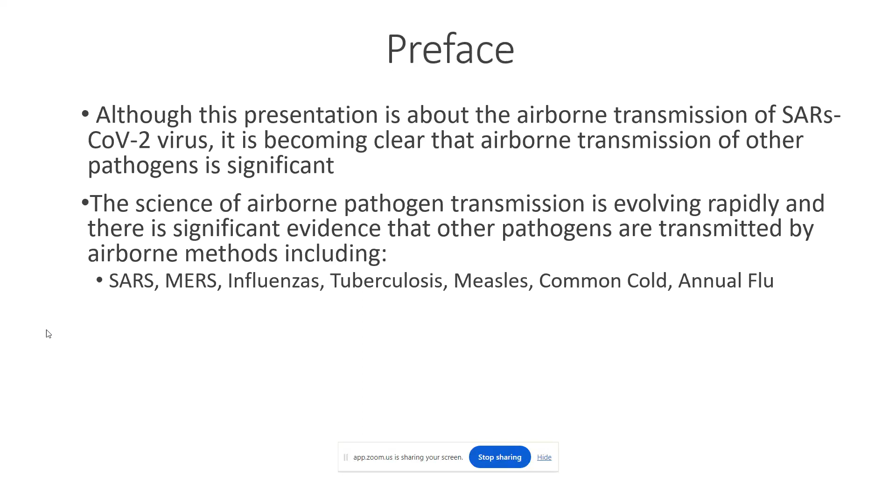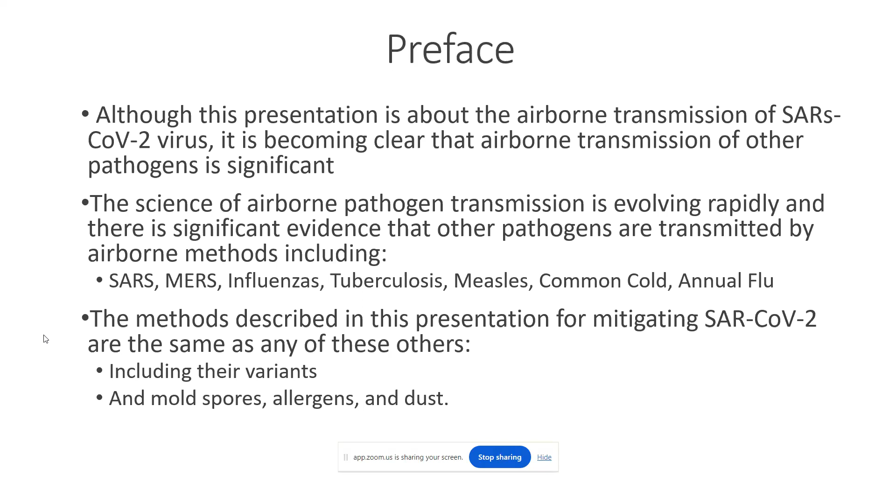So we are indoors. We spend more than 90% of our time indoors now as humans. And so the indoor air environment is going to continue to become more and more important. So we're going to be talking about SARS-CoV-2 here primarily, but all their variants, including mold spores, allergens, and dust.

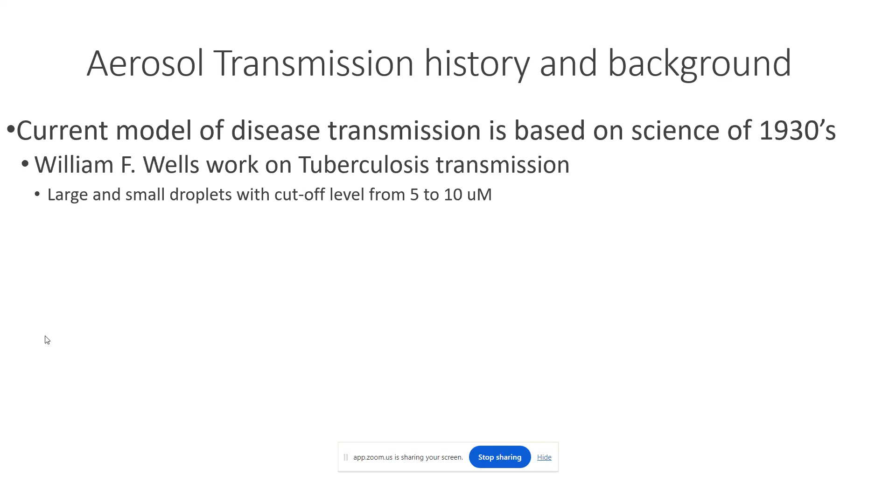So the history dates back to the 1930s on this. A fellow named William Wells worked on tuberculosis transmission, and they thought at first that there was this cutoff level at 5 to 10 microns of size, and that it would fall off quickly after that in terms of size. What we find is that that's not the case, that these coughs and sneezes and talking loudly are really multi-phase events, multi-phase turbulent, which means they have liquid and solid and gas in their output.

It's moist, warm air that comes out of your face and nose and so forth, and that it can extend to distances up to 100 feet per second and 30 feet away from where you are. It is heavily influenced by indoor air temperature, humidity, and airflow. And once evaporated, they can stay in the air for hours.

The half-life of the CoV-2 pathogen is 1.1 hours. It is also true for influenza, it's 1.1 hours. So these things have a lot in common, and they tend to float, particularly the small ones. They float on the air. They float on the thermal currents in a room.

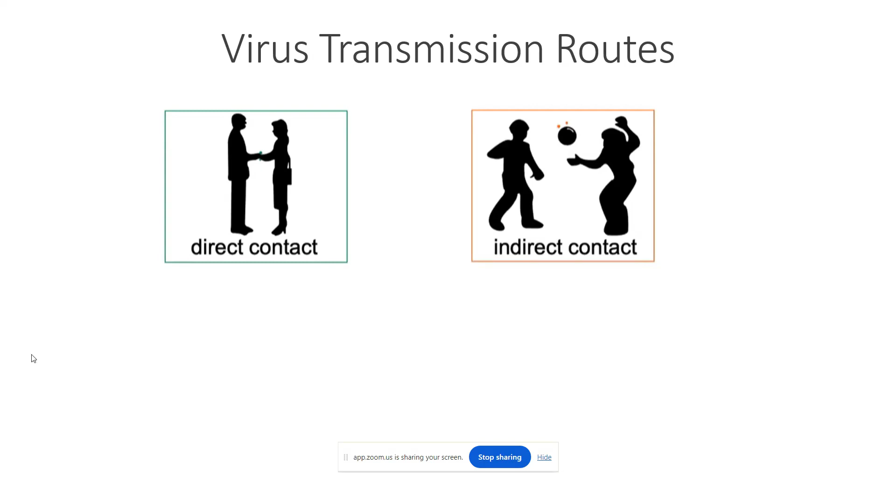Now, there's different transmission routes. There's direct contact. That's shaking hands with someone. There's indirect contact, where you touch a doorknob or a handle that someone else has touched. There's large droplet spray, which some of you unfortunately have felt when someone's too close to you or sneezes or is talking to you loudly in a confined environment, and you can feel it. Not a pleasant thing. And then there's aerosol.

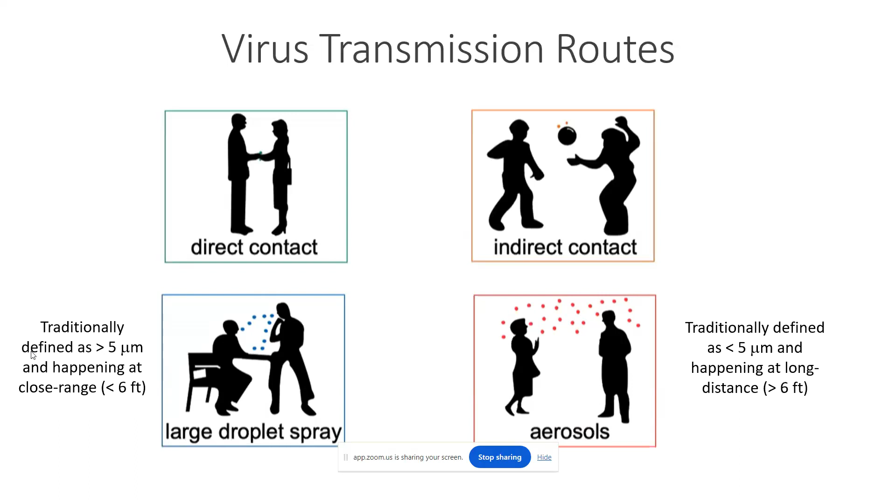Today we're going to be talking about aerosol, and it has traditionally been defined, as I said, by Wells back to the 1930s as having a specific size. But that's not really true. We've learned a lot through both experimentation and analysis of situations, and also computational fluid modeling, which is one of the areas that I specialize in.

We had the bus trip, where on one side of the bus, people got sick. On the other side of the bus, they didn't. We had the restaurant, where 10 out of 68 people became infected in the same area of the restaurant. And then we had the call center. So these are all what we call super spreader events, and they were places that we had the opportunity as scientists to study just exactly what the situation was, some more than others, but clearly these stood out as events.

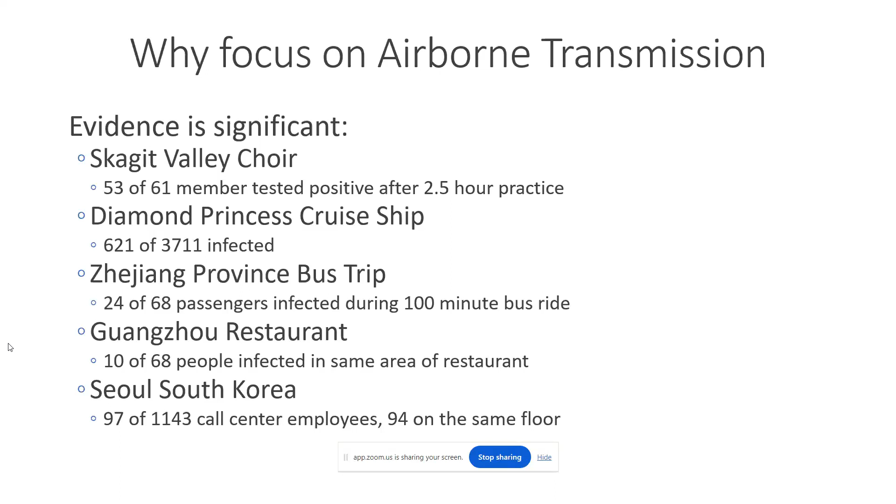By the way, no transmission outdoors. So there is no transmission of these airborne events outside. It's only in the building. And so air quality inside of buildings is becoming more and more important for these reasons.

The transmission mechanics are really that there's this thing called a viral load. And the viral load, let's see if I can, yes, I think I can. So the viral load comes from this spray that comes out. The viral load is defined by the amount of virus per unit volume. Some people tend to spread more heavily than others, because they're at a different point in their incubation life of the pathogen. And so the viral load can be higher because there's more virus per unit volume.

And what happens after someone breathes or sneezes or sings, depending what they're doing, is it becomes very, very light. It dries out, particularly if the humidity is low. And one of the things that characterizes New England winters in particular is low humidity. Low humidity tends to dry out the droplets. And when they dry out, they become light and they float on the air current in the room, primarily driven by either the cooling system or heating system, or just the thermal temperature of the room.

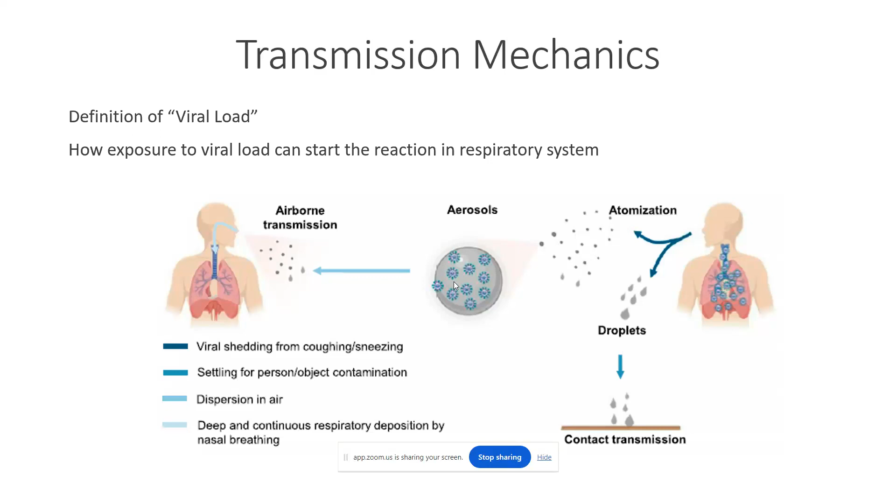By the way, each one of us is about 100 watts of energy that we put out. So you can think of each one of us as a light bulb. And if you've ever gotten close to a light bulb, you know it gets pretty warm. We're 98.6, and we create a thermal plume ourselves that goes up. And in an environment where the ceiling is low, it hits the ceiling and begins to spread and fills the room with a concentration. And then it transmits.

Now, what we also have learned through the science is that the infection period is really a little after 3 days, about 3 days, it starts to peak.

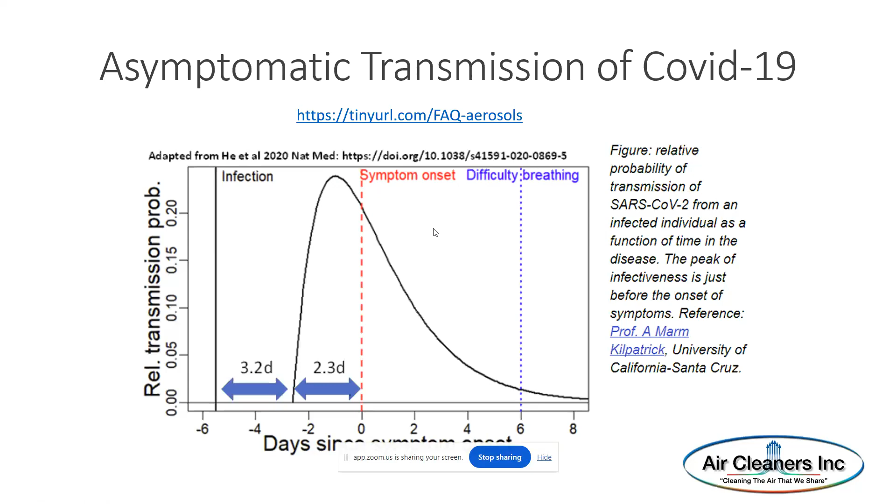Still true today. It's also true about the common cold. By the way, COVID-19 is here kind of a proxy for the common cold or for the viral flu, the annual flu. All these things behave the same way. Size of the droplet is important. As the droplet gets smaller, it gets lighter.

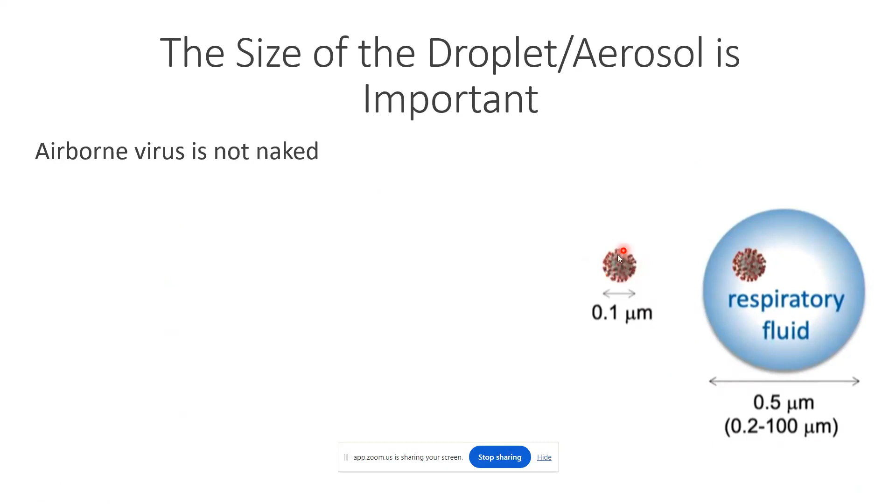Now, we say here that the virus is not naked. It tends to hang around. It attaches itself. So the actual virus itself is about 0.1 microns, but it generally hangs around respiratory fluid. It attaches itself to liquid, and as the liquid evaporates, it becomes lighter. And this does determine how long it stays in the air, how far it can travel, how quick it falls to the surface, where it deposits in the respiratory system is a function of this as well.

Our respiratory systems are best when there's humidity in the air, because the upper respiratory section of our bodies is a major preventative of airborne pathogens, but it needs liquid to behave itself really well. The cilia in our upper respiratory tract is a disease prevention mechanism, and when it dries out, it's less effective. And then the pathogens, the particles, go deep into your lungs and tend to infect you quicker and more seriously.

So masks help and filters help. We'll talk more about masks and filters, but the physics is all the same. You want these things to not be there in the first place, or if they're there, you'd like to keep them as large as possible with water, so it falls to the ground. And you'd like to have water in the air so that our defense mechanisms work better.

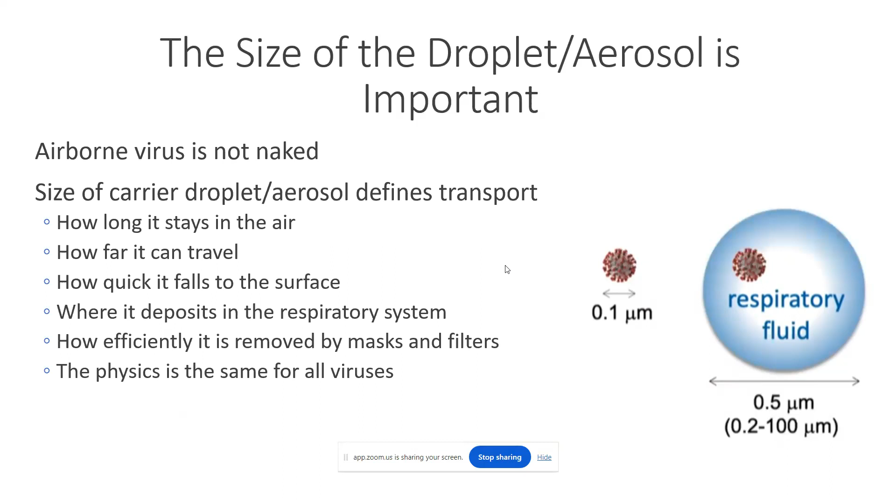This doesn't lend itself well to New England, by the way. New England is characterized by, in the wintertime, cold and dry. The dryness makes our respiratory systems less resilient and more susceptible. And the dryness also tends to make the pathogens last longer in the air. They hang longer. As I mentioned, their half-life is over an hour.

PM2.5 is awfully small, and that's a 2.5 micron particle, and we're finding that we're down in the range of 1 micron when these things dry out. The pathogen itself is 0.1 micron. So these are very, very small. They obviously can't be seen. This is one of the other problems, and they float.

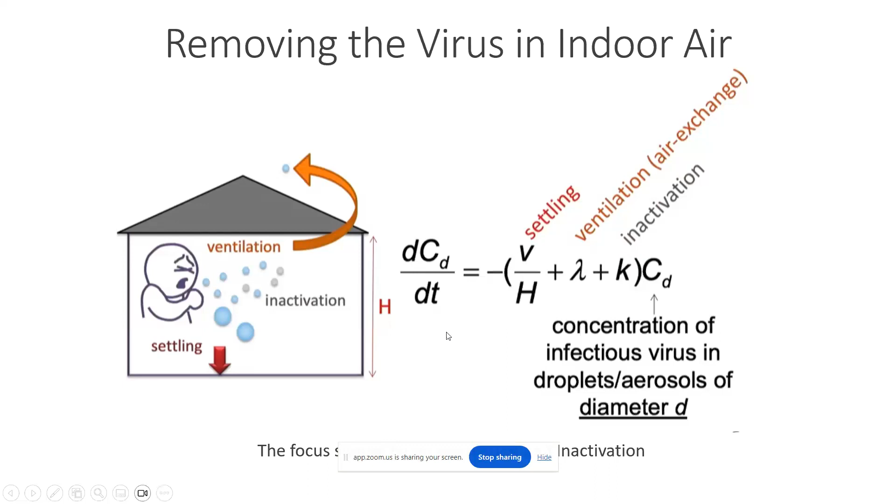So here's a plot of, again, the size. This is half-life. So the half-life of the particles for CoV-2 and CoV-1 both are in that range of 1.1 hours at a relative humidity of 65%. And it survives about 16 hours at 53%. So it hangs around a long time. Again, the half-life is about 1.1 hours.

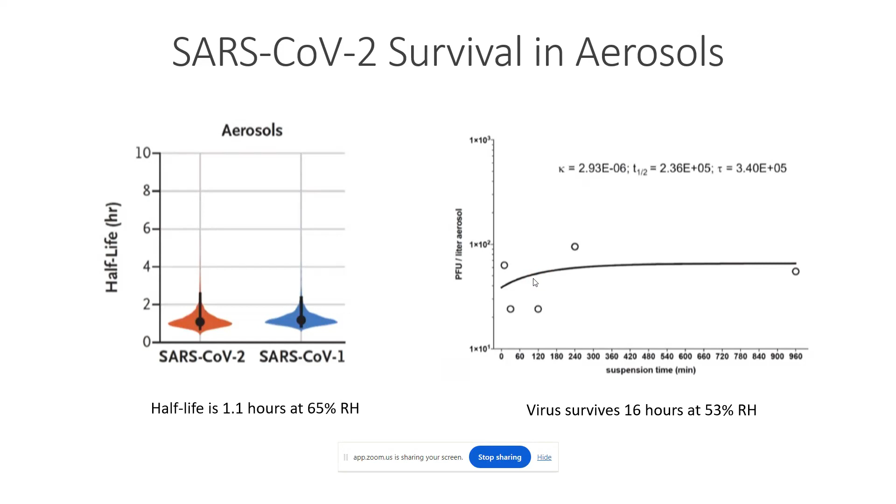So it hangs around. And this is why we have witnessed events where people come into an environment that has no one in it and they get COVID in the environment because someone was there who had it, who put it into the atmosphere of that environment, and then someone else came in and breathed it. So, you know, there's questions about pathogens in general and infection risk in general. COVID has made us more susceptible and more aware of all of this, but these are general issues that exist. We've known it for some time. The indoor environment has not been perfect. In fact, far from it.

Now, ASHRAE, of which I'm a member, ASHRAE stands for the American Society of Heating, Refrigeration, and Air Conditioning Engineers, about 65,000 members worldwide of professionals, including many people in the national laboratories like Pacific Northwest National Laboratory, who does a lot of work in this area, or NREL, the National Renewable Energy Lab out of Colorado, does a lot of work in this area as well. And together, they create these specifications for minimum acceptable criteria for indoor air quality.

And I want to bring this to your attention because all the environments you're living in, you're standing in, you're sitting in right now, should conform to these specifications. And in general, they don't. I can tell you they don't because I study a lot of them. I analyze a lot of them. I go and measure a lot of them, and they're woefully inadequate. And that's just evolution. It's history. We haven't had to pay much attention to this topic over time. And now's the opportunity to do it before we have another one of these outbreaks.

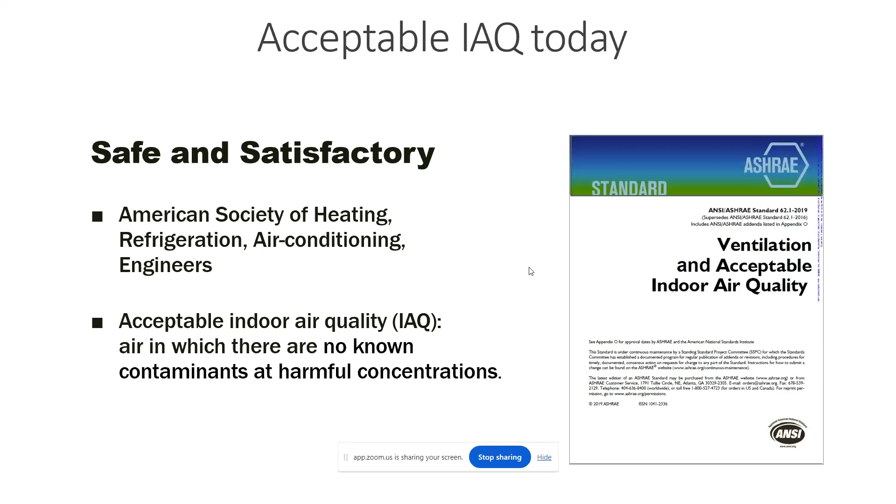But I've been in many environments in both healthcare and in buildings, just office buildings, and of course in our homes, where we're nowhere near the minimum acceptable exchange rate and ventilation for indoor air quality. In terms of impact, it has a huge impact. This just shows you some of the impact in terms of cost. We know it costs a lot to have sick people. These numbers are not going to surprise you, productivity and potential savings. This is 1996 data. We've got 20 to 50% reduction in health-related syndromes if we clean up the indoor air environment, the potential savings.

There's been a book written about this by Joseph Allen and John Macomber out of the Chan School of Public Health in Boston at Harvard. And the book is called Healthy Buildings. And they make the case that if you clean up the indoor air environment and give people a better environment in which to work, that in fact productivity will rise because you'll have less people out sick and they'll feel more healthy. And that will translate into productivity, and it will more than pay for itself.

But if you look at it just from a cost point of view, it does cost money to fix these buildings. If you look at it from an economic finance point of view, it's worth it to do it. But we face resistance because many people don't want to do it. Many building owners view it as the last thing on the list. The health of the building is really far down at the bottom, and we're trying to change that.

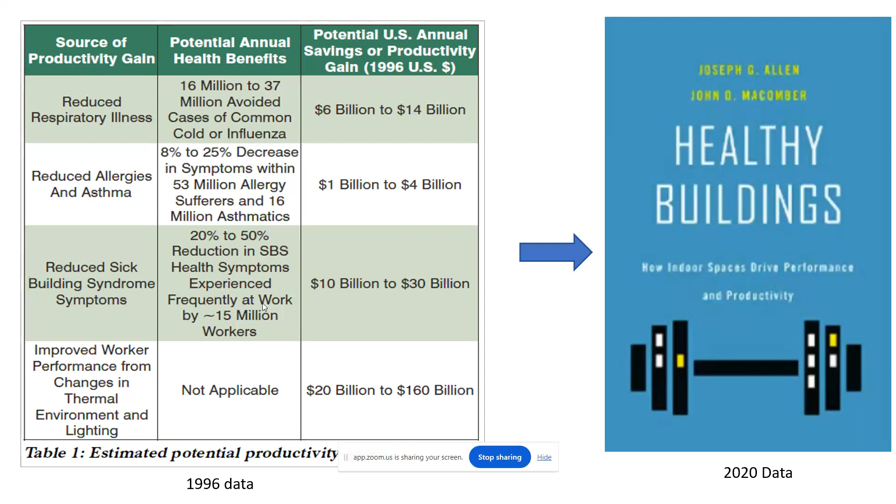I've done studies in California schools. One of the national laboratories, I think it was LBL, did a big study with the schools in California and found cognitive response improved significantly when the kids got fresh air. And they do it by measuring carbon dioxide, which is a proxy for oxygen. The more carbon dioxide there is, the less oxygen there is in a given environment. So they measure it using carbon dioxide sensors, but what they're really trying to measure indirectly is the amount of oxygen in the environment.

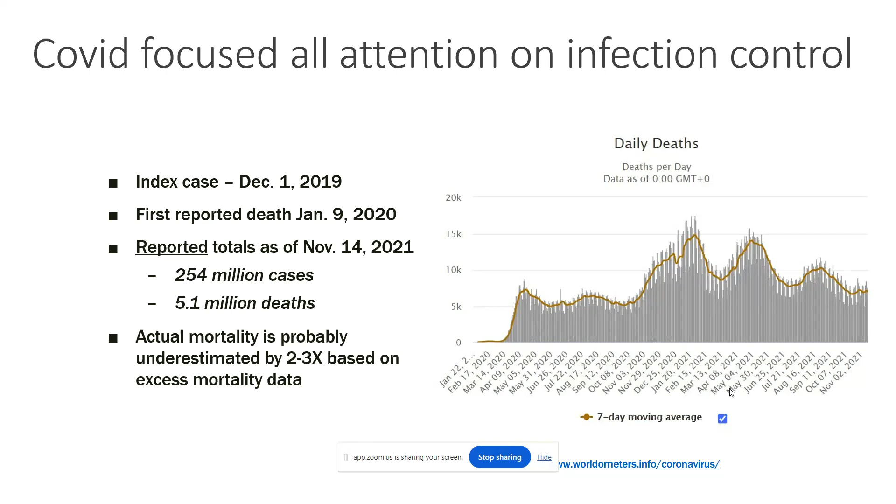So we know this is the case, and we tend to focus our attention on infection control. And this is COVID numbers. But what we've learned is that airborne transmission is the dominant transmission, and that these long-held beliefs about infectious disease transmission are really wrong. Questionable at best is being somewhat gracious, because they're not really questionable. They're wrong. And that everything occurs indoors. There have been no confirmed cases of COVID transmission outdoors during the entire pandemic.

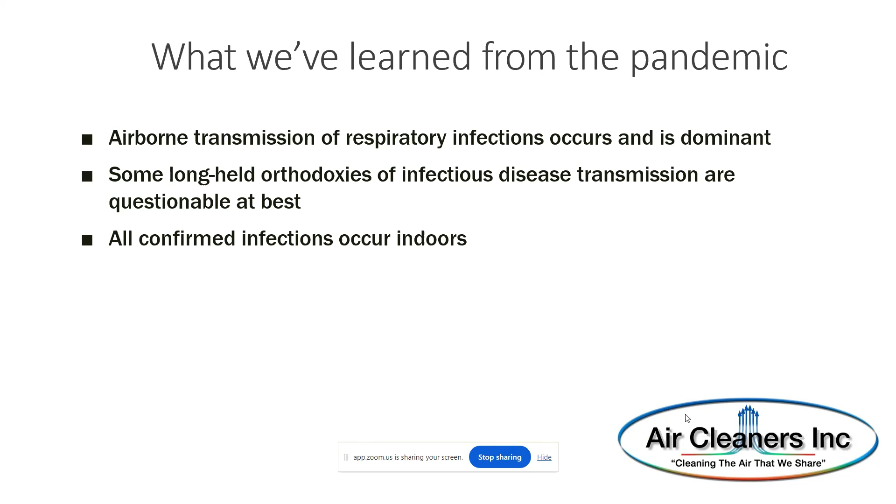And our heating and cooling systems in our indoor environments play a really important role in risk mitigation for indoor environments. But existing buildings as they are, because they're old and they weren't designed necessarily with this in mind, don't offer us much protection against airborne transmission. I'm afraid to tell you that is the case.

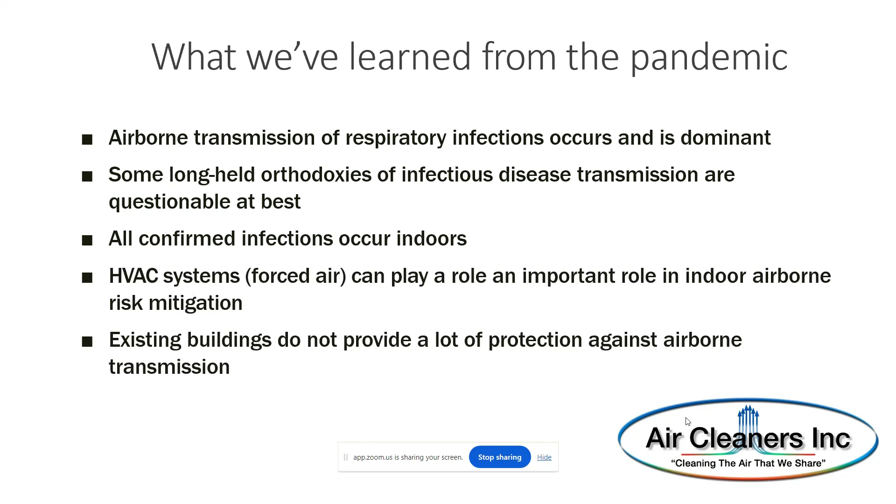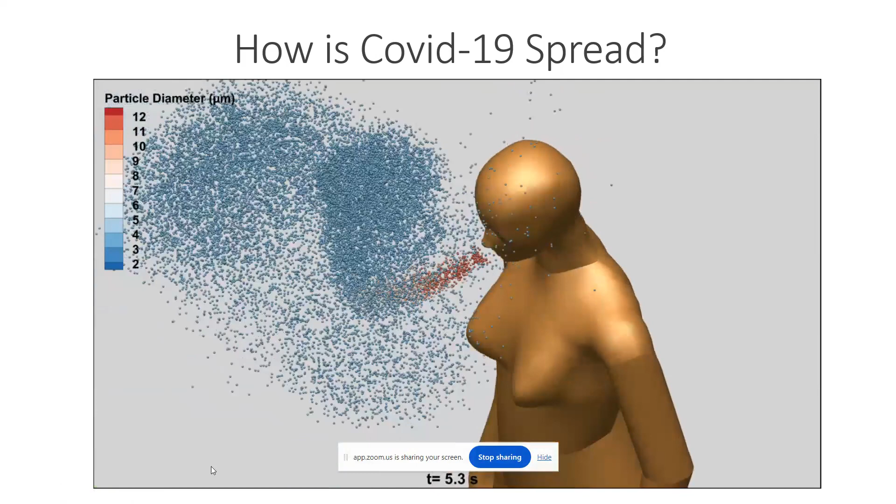This is an animation sequence. If it works, yeah, it looks like it's going to. I hope this comes through for you. A computational fluid mechanics example of someone sneezing or coughing in this case, and you're watching the plumes come out of their mouth, and those are particles that represent droplets, and you can see when you're in close proximity that it just infects the other person quite dramatically. So hopefully these are not virus particles or pathogens, but if they are, you can see very quickly why someone gets infected.

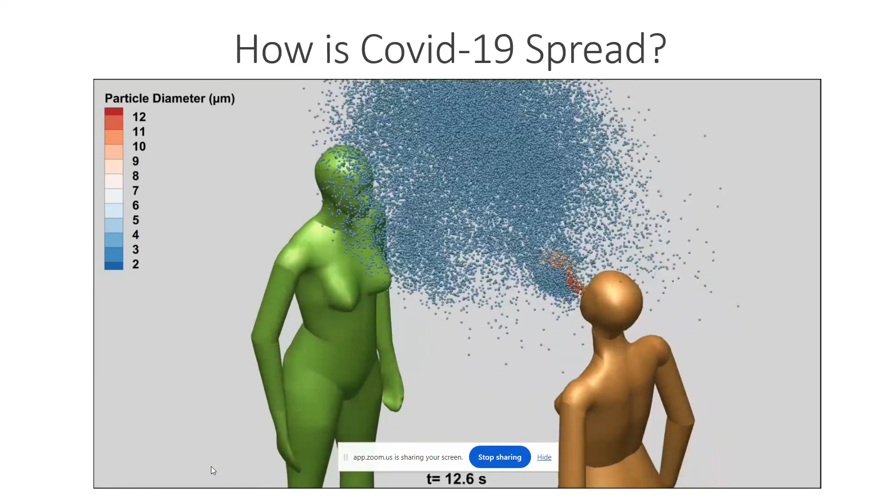So now let me just switch a little bit, and some of this material may get a little thick for you, I don't know, but I'm going to go through it, and if you want me to do it again, or break any of these down into smaller sections and do them individually, I'm more than happy to do it. My job is education. I try to teach this stuff, so I'd be willing to do it more in the future if you ever wanted me to.

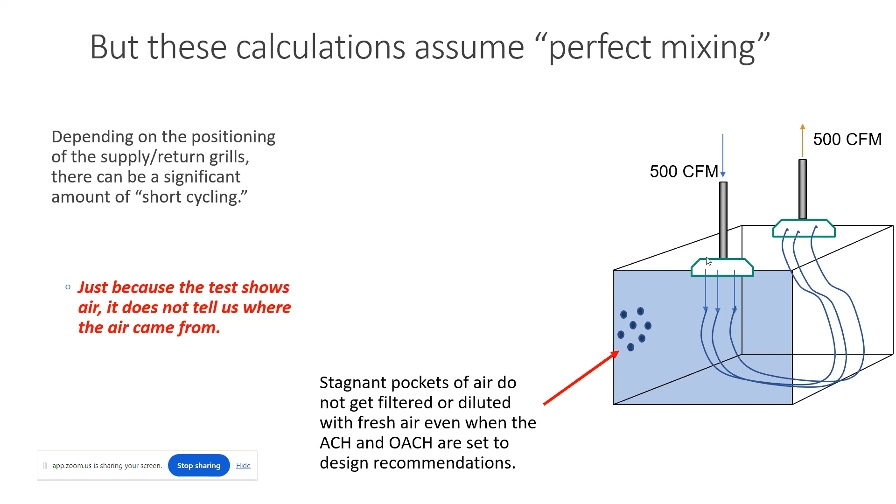We have a measure for that. It's called MERV, minimum efficiency reporting value, MERV. And it should be about 13. The MERV 13 is the level that we're looking for. But the location of diffusers makes a big difference too.

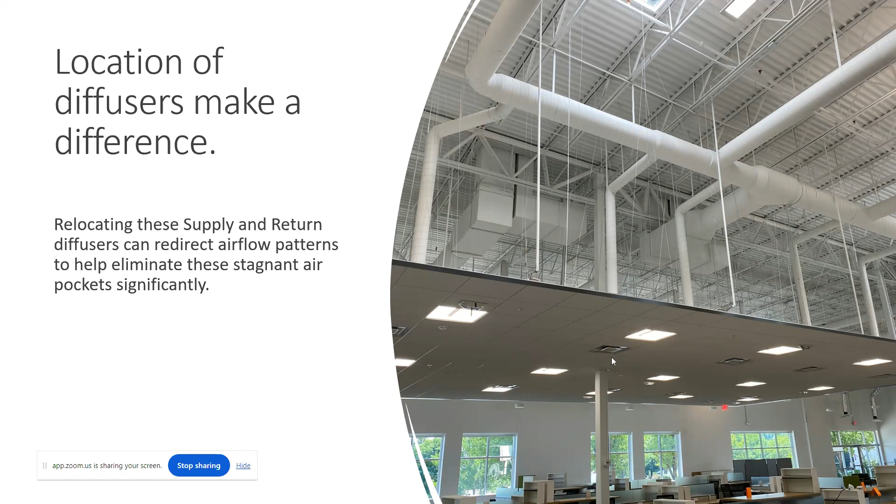This is an example of an office environment. You've got supply going in out here and return going on up there. So, this one's far from perfect. The positioning of the supplies and returns is really important and wasn't thought about in the design of your buildings, because your buildings that you're in right now were built before anybody really thought much about this. Most of the time, the location of the diffusers, the air supply diffusers and the return grills, is laid out for cost reasons, not for pathogen mitigation reasons.

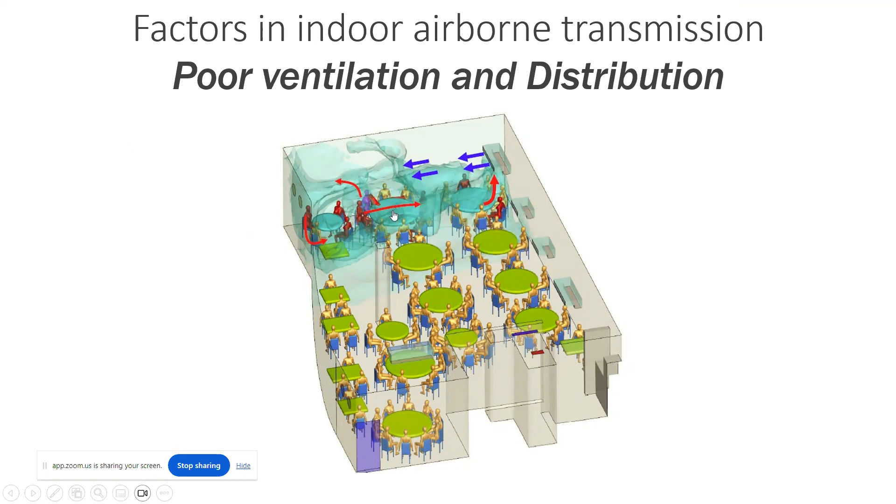And we've seen very effectively that in certain cases, and I think this might be an animation sequence, this is one of the cases, yes, I'm going to get to play this. I hope you can see this. This is a restaurant in China that we studied very carefully. I didn't do it. This was done by some scientists out of China who did this work. And you can see that there's these devices up here that are supplying air, and then there's returns underneath. So this is a recirculation device.

And you can see these people over here in red. They all got infected. This was a restaurant. This was a very famous case of a super spreader event where only people on one side of the restaurant got infected. And they built this animation. This is called computational fluid dynamics, where you can actually model this on a computer mathematically. And I'm just going to run it a little bit, and you can see there's the super spreader right there. You can see the super spreader person is emitting the viral load into the environment.

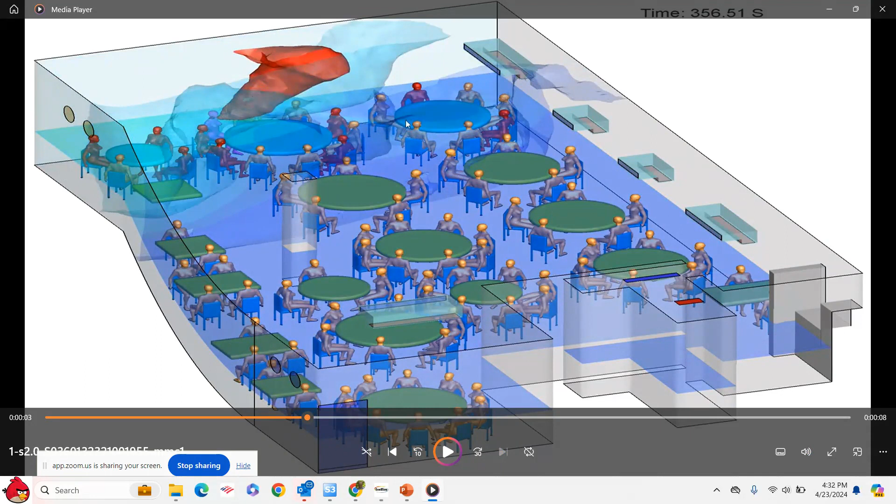And what happens is it gets sucked into this circulating effect here between that heat exchanger, and it gets pulled in, and you see the whole place, only on that side, starting to turn red because the air current is picking it up. And you can see the red zone right here. And all the people that you see in red there got sick. And in some cases, they were just facing the wrong direction. They were facing into the flow. In this case, they were near it. So even where you are in a room can make a big difference about being infected.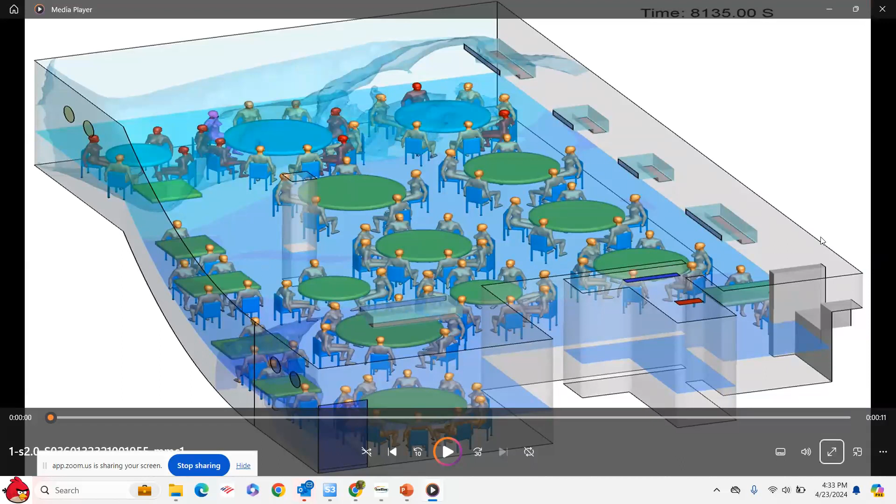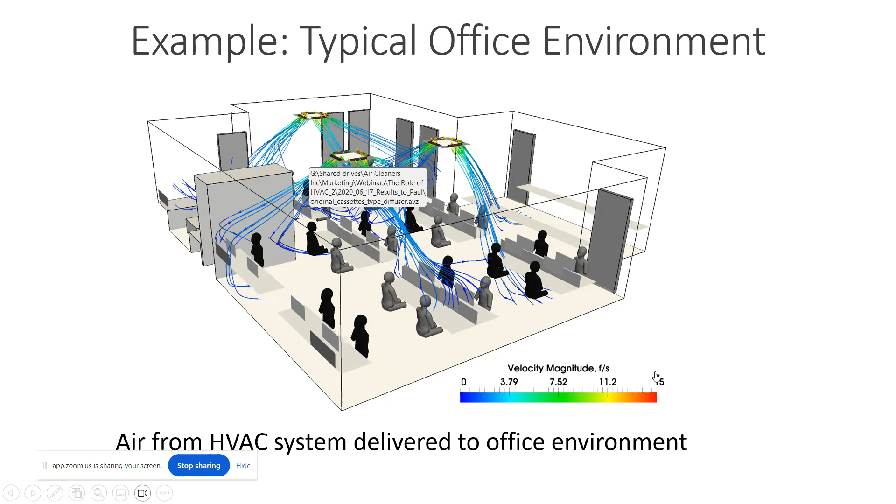So let me get back out of here. So depending where you are, it can make a big difference. This is another sequence here. This is inside an existing room. This is another animated sequence that doesn't look like it's going to work. Nope. But again, you can see a similar effect just from the image. The air is coming in, people are sitting here, and because of the location of those devices, it can be a situation where you can become very infected.

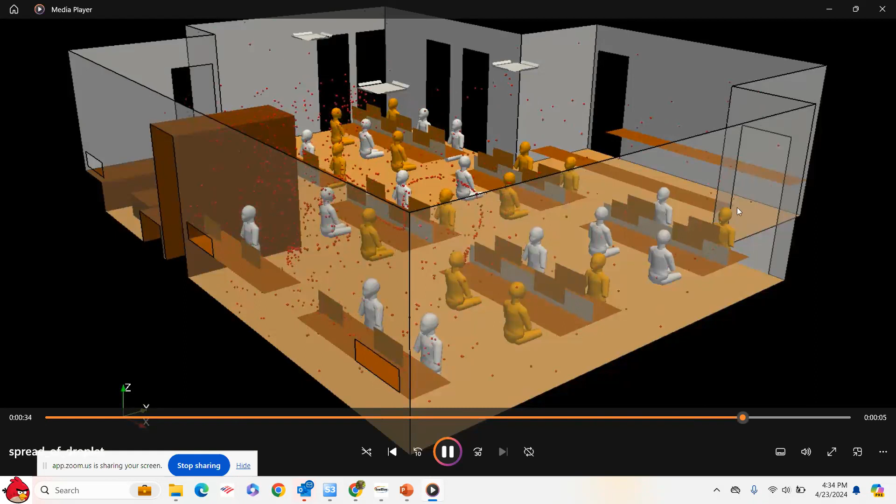So here's another one. This is another animation. You can see the infected person. And what's happening is the air current over in this region, because there's an air supply right here, is causing high concentration in this area. So the particles are coming out of the person, going over to this section and accumulating right in this region of the room, causing the concentration to be high over here. Therefore, people over in this section of the room are going to become infected when people over here may not be. So it's not even uniform within a single room. There tend to be zones of safety, if you will, or zones where you don't get infected and others where you get very infected.

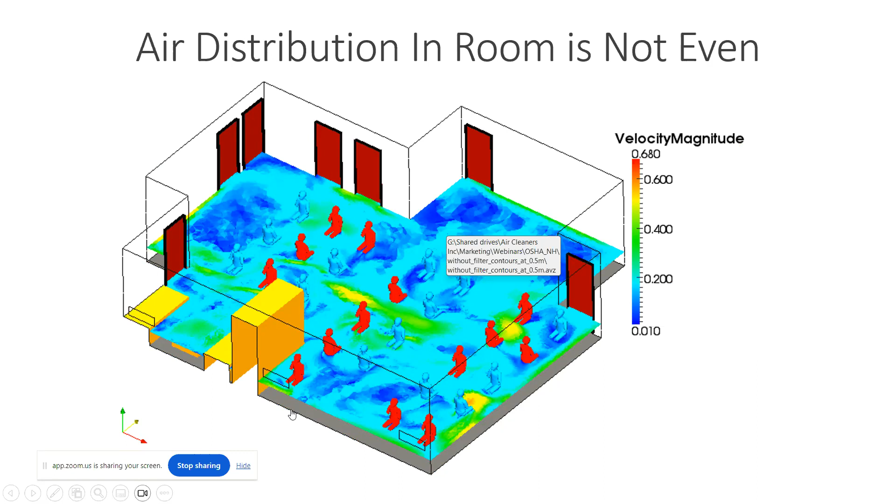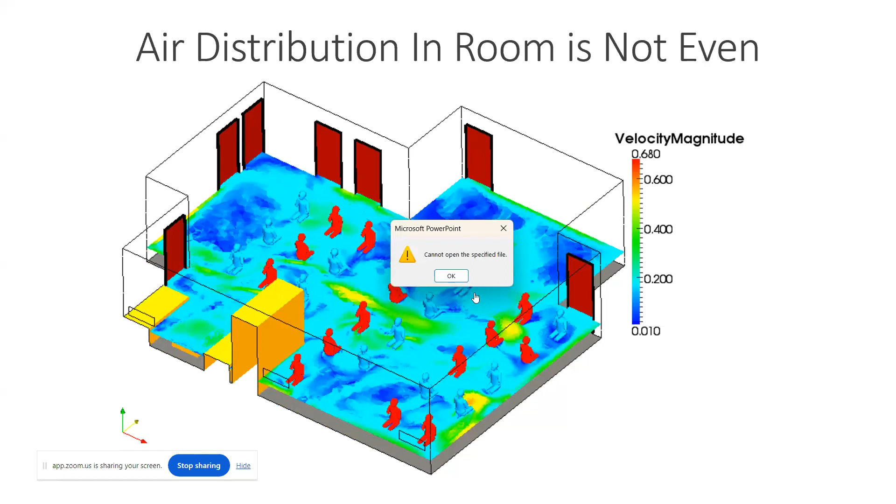Okay. So just a couple of animations. This one shows you here what we're looking at is velocity. You see the velocity is not uniform. What happens is it changes as a function of location. Here I've taken a slice down low. This is the same office environment. You can see some dead zones. The dead zone is velocity of 0. And what happens in a dead zone is, and you can see the one over here I was animating before, it typically will accumulate more readily over there. You can see I've moved up one level now. This dead zone is now quite prominent over in this corner, and so on.

So what do you do? Well, cleaning and ventilation are really additive. If you can't ventilate properly, it's important to clean with filtration. There's a couple ways to do that.

Most effective is HEPA filtration. That's the one that you'd really like to have. You can also do it with something called UVGI, ultraviolet germicidal irradiation. HEPA is high efficiency particulate arrestor filter. So HEPA is as good as you can get. HEPA is what's used in an operating room. In an OR, we use HEPAs overhead, and UV is the light.

So you can see here that relative risk is number one when there's no ventilation. So you walk into an environment where there's no air at all, and you're going to have a relative risk of 1. And then what happens if you ventilate, you can drop it by almost 40% just by getting ventilation there. Open the doors, open the windows, turn on fans, get some fresh air in.

You can do a similar thing with filtration as well. It's not quite as much with just filtration, but it works pretty effectively to have filtration in the room. Again, this is a function of how much filtration, how fast you're moving it, how well it's mixing. You can do both, and when you do them both, it's very effective.

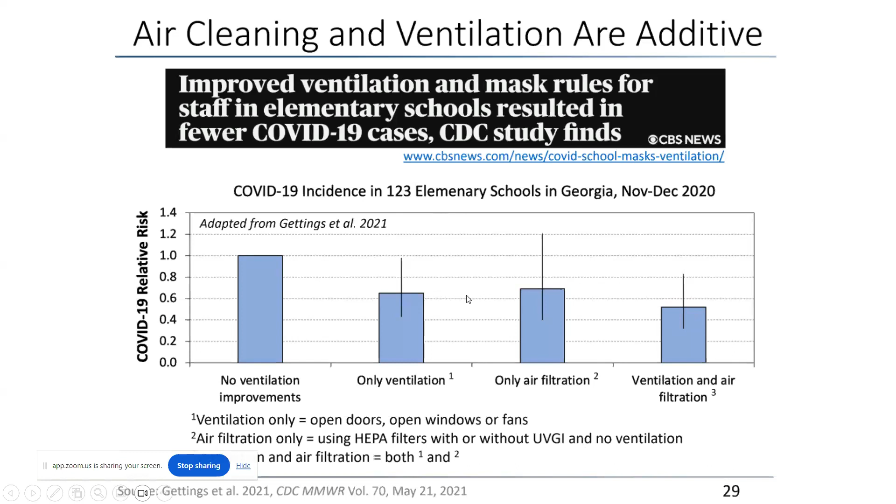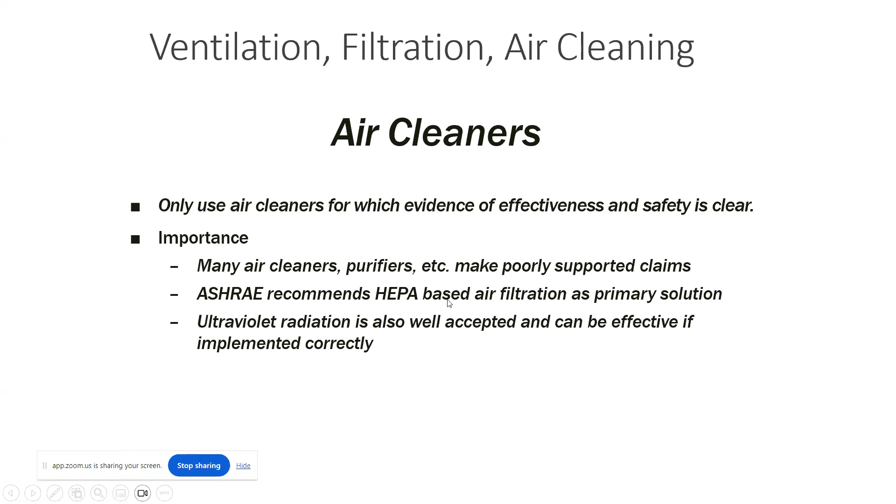A little bit of filtration, portable HEPA, for example, and proper filtration in the HVAC system, and proper air change rate in the environment. So this was empirical evidence that they studied using elementary schools in Georgia. So air cleaners are a way to do that, and ASHRAE recommends HEPA-based filtration as a primary solution. UV is another way to do it.

And with respect to 2.5, studies have shown that air cleaners that can handle what's called PM 2.5. There's 2 measures. This actually came from outdoor air monitoring. PM 2.5 are all particles that are smaller than 2.5 microns in diameter. PM 10 are heavier, they're 10 or less. And the EPA has criteria in place for what these numbers ought to look like.

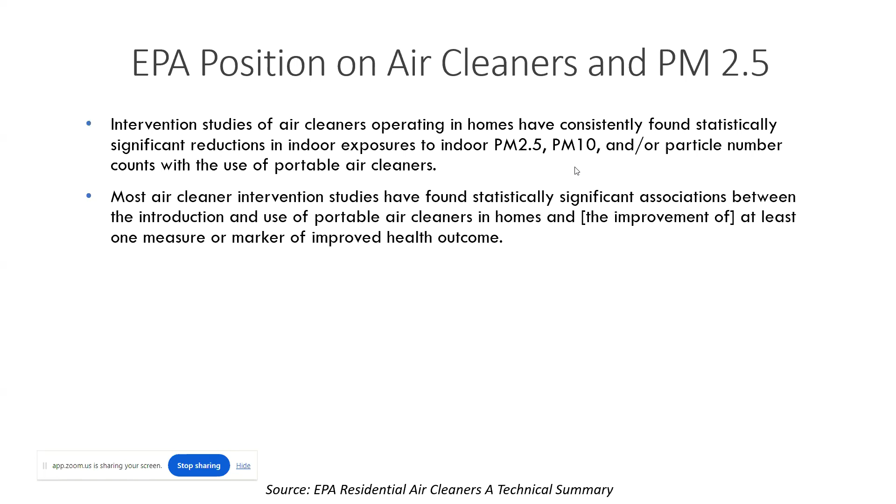And there is a significant statistical association between portable air cleaners in the home, for example, and improved health outcomes. But you need one that delivers enough air. You need one that does in the range of 100 to 300 cubic feet per minute. So you need a good one, I guess is the point. So air cleaners became an important component of this.

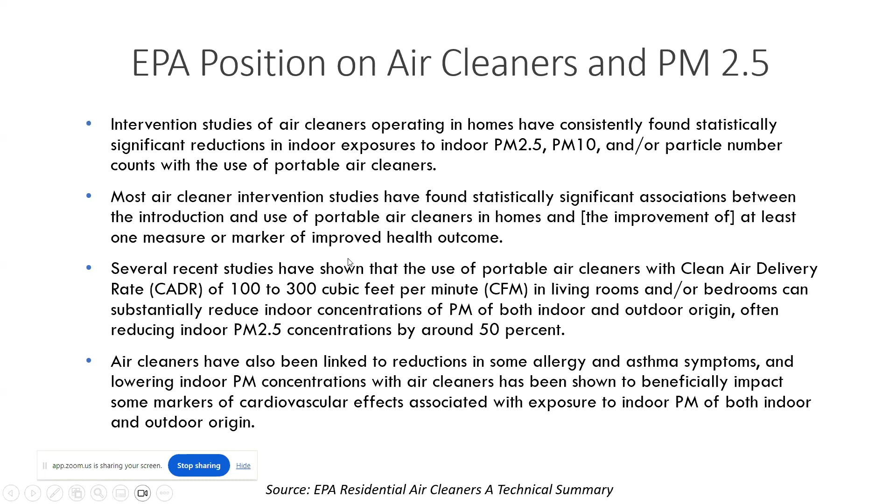We got involved with air cleaner development for a period of time, and we built a device that worked extremely well. I'm not going to go into all the detail of it here because it's just one of many on offer. But they work well. They tend to drive particle count down very quickly. This is a plot of how well they work if you have a good one. And you can see that it comes down from a really high contamination level of 100.

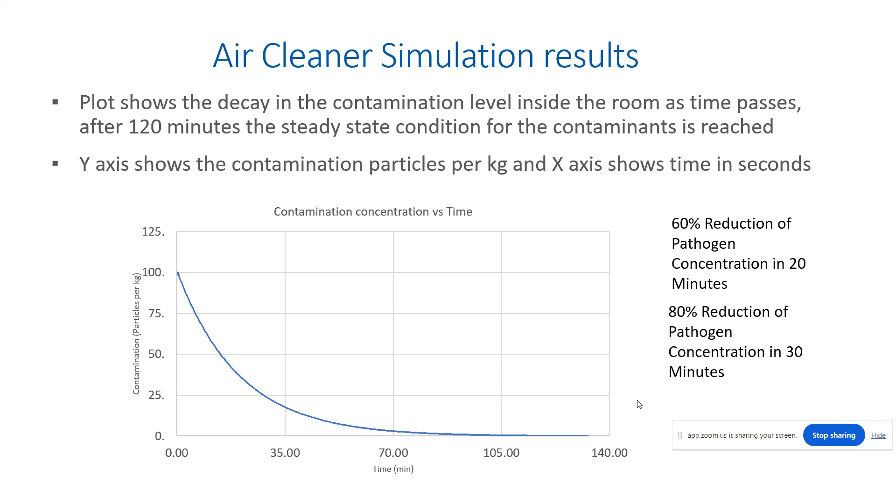What we're finding is that you can eliminate 60% in 20 minutes using these kind of devices. Okay, 60% reduction. Okay, 60% in 20 minutes. 80% in 30 minutes is measured. This was measured. We did a test on the ones we built. NASA did this work and chose it as a device because it performed that well. They were quite surprised. They called us and said, "Are we doing something wrong? It seems to be working awfully well." But that was just how it worked.

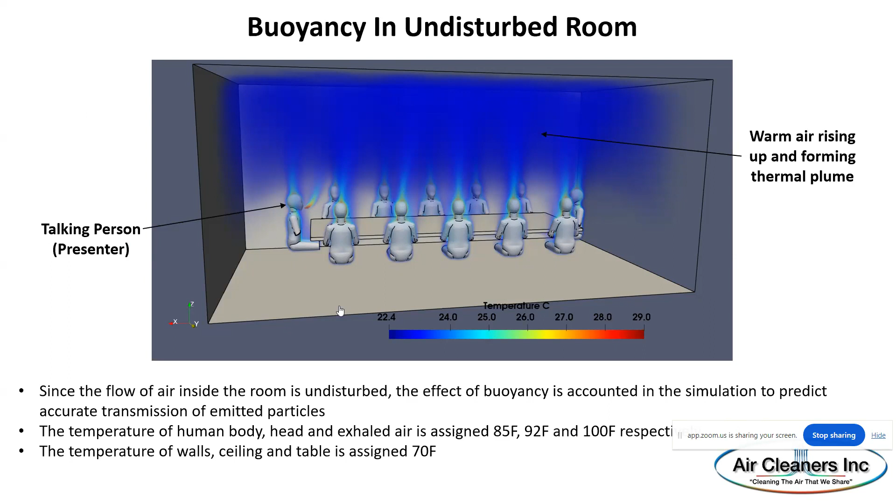So anyway, I don't need to go through all of this. I think there might be a couple more animation sequences here that are worth watching, if I can get them to run. So this is someone breathing in a conference room without any help. You can see that plume come straight up out of the person. So there's no filtration going on here in this room. And you can see over time that room gets full.

This is a typical conference room. The person is breathing normally. There's nothing going on there. They're just having a meeting in a room, but there's no filtration. This is over a 1 hour period in a room without filtration. And you can see there that the room continues to turn red over that period. This is a time step sequence.

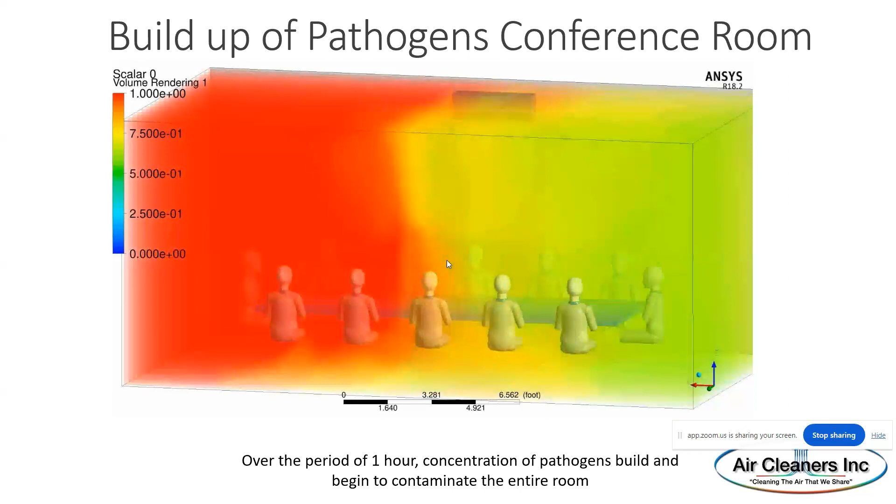Again, we're modeling this using computational fluid dynamics, which is the primary tool used to study this without having to get people sick in a room. You model it. And this was a prediction we did using our software. This is an example of the same environment.

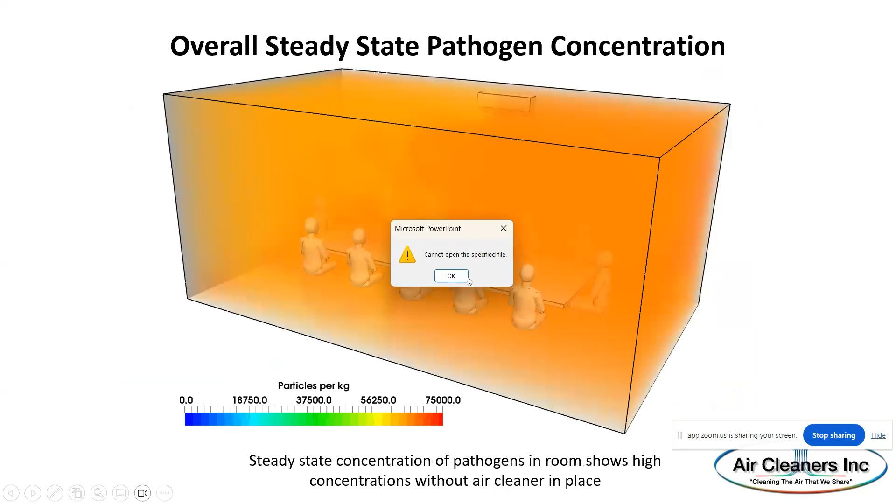And if you ran that, you'd see it cleaned up very quickly. So in this case, we put an air cleaner on the table, and you can see the room never changes color because the pathogen's coming out, and it is running here. You can see it running at the bottom.

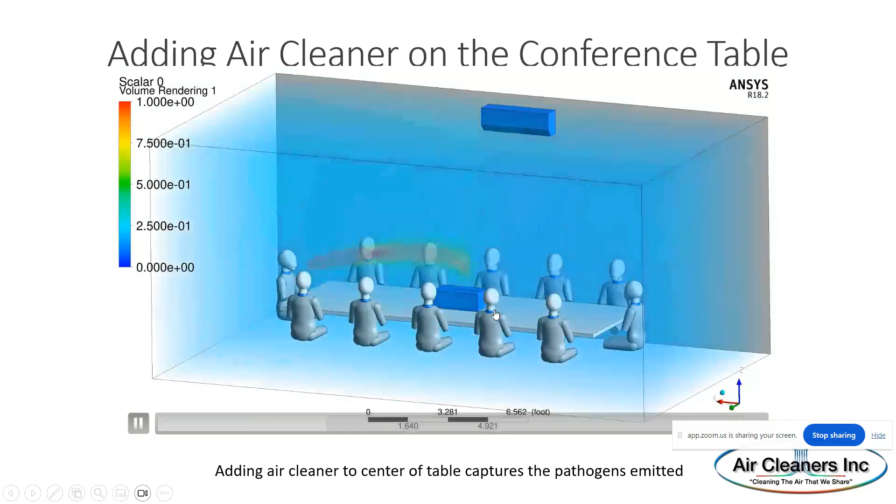So this is the same 1 hour period, and the air cleaner's running, sitting in the middle of the table. It turns out it can be anywhere. It doesn't have to be in the middle of the table. You see the room stays blue under the same conditions. So, it makes a difference. Air cleaners can make a big difference. To not necessarily replace what you have, but to supplement it. Hopefully what you have is working.

By the way, they should always be on. If you're in an environment on a day-to-day basis and the diffusers overhead are not blowing continuously, it's wrong. They should blow continuously. The way they've been set up historically is they only modulate on temperature. So if the temperature gets high enough, they turn on the air conditioner. If it gets low enough, they turn on heat. Otherwise, they're off. But the off condition is horrible for pathogens because it allows them to accumulate.

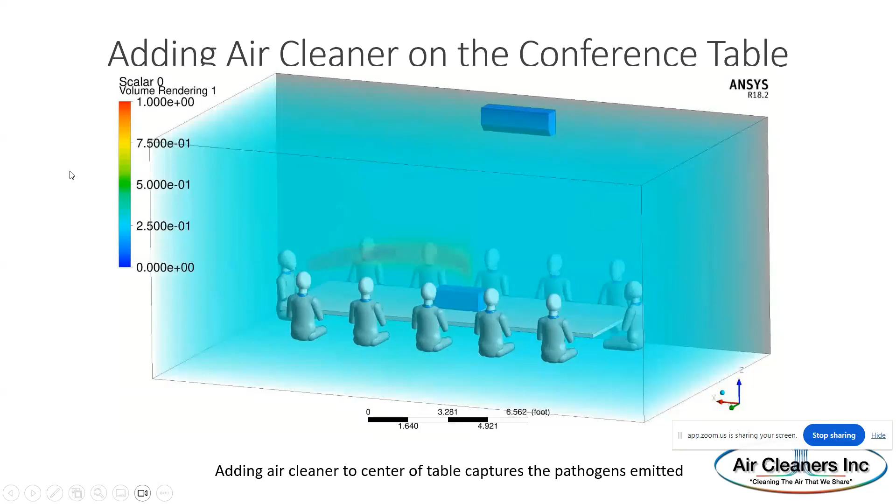They should be on fan only. They should be running all the time. And many people simply don't know that. They don't know that. And so they're set wrong. Most of the buildings I enter, they're set wrong.

So anyway, this is the point that it's time for a new look at this. There's been a lot of work done on it. It was done during the COVID period. It seems to me that it's gone quiet. Everybody's back to normal and tries not to pay much attention to it.

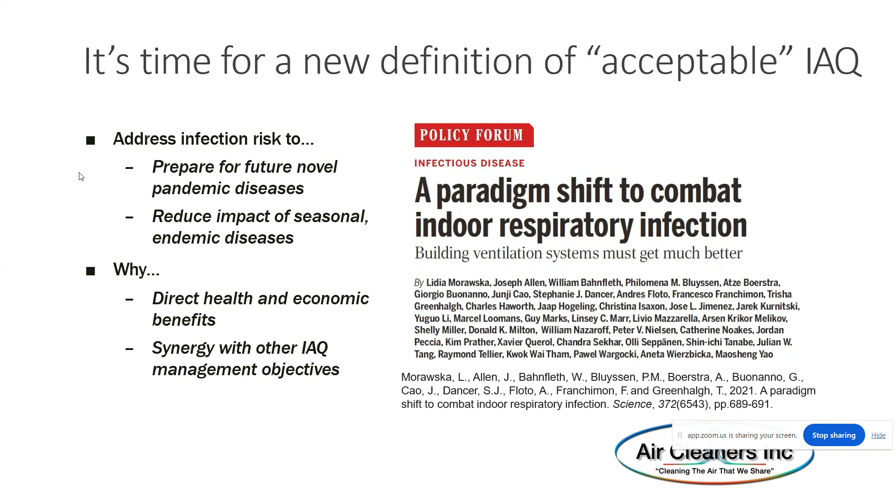Because I'm talking to people in the healthcare industry, I'm hoping that you'll be more sensitive and use this opportunity as a time where we can build a defense against the next pathogen. There will be more. We know how to fix it. We know how to improve it, but we need willing participants.

So anyway, we're beginning now to look at new definitions of health and wellness. There's a push for healthy buildings, and it's air quality, it's thermal health, it's having the right humidity in the room, it's safety, it is water quality. So at ASHRAE we talk about this healthy buildings, and it correlates directly to human health. This is a human health issue.

We find that if the building is healthy, the humans are healthy, and they have better outcomes. They have better social outcomes. They have better intellectual outcomes. They have better productivity. These are linked. This shouldn't surprise us. 95% of our time is inside of buildings. We need to make them healthy so that the people are healthy. And this is gaining some attention. And I would encourage you to think about it and possibly get us involved if you need it.

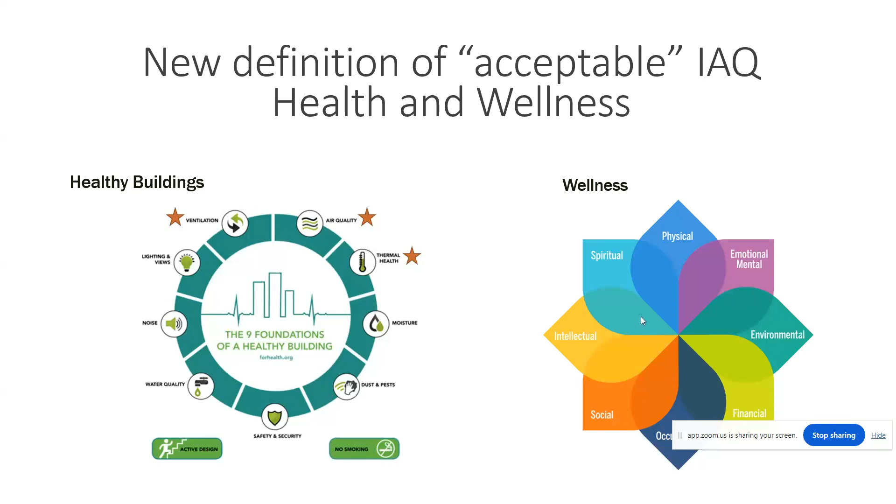Unfortunately, it took a pandemic to do it. And we have to overcome barriers: scientific justification, economic justification, split incentives. You have a multi-tenant building and the landlords live somewhere else and they don't care about what's going on. And that's just a home ownership situation.

If you've got a building where you're leasing, many of you in healthcare have been in situations where you actually lease the space from the building owner, but the building owner has different motivations than you do, and theirs is cost and yours is human health, and that's an issue. So we need some better improvements there. It is certainly a barrier that we need to overcome.

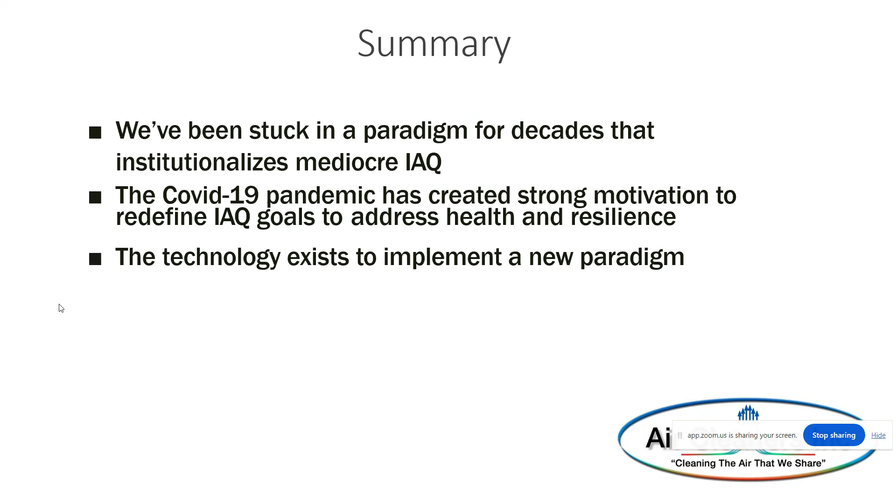But the point is here, and we've been stuck here for quite some time with inadequate or mediocre indoor air quality. And the pandemic created a strong motive for us to redefine these goals and address it in a real good way. It's not a technology issue. We have the technology. The outcomes are great.

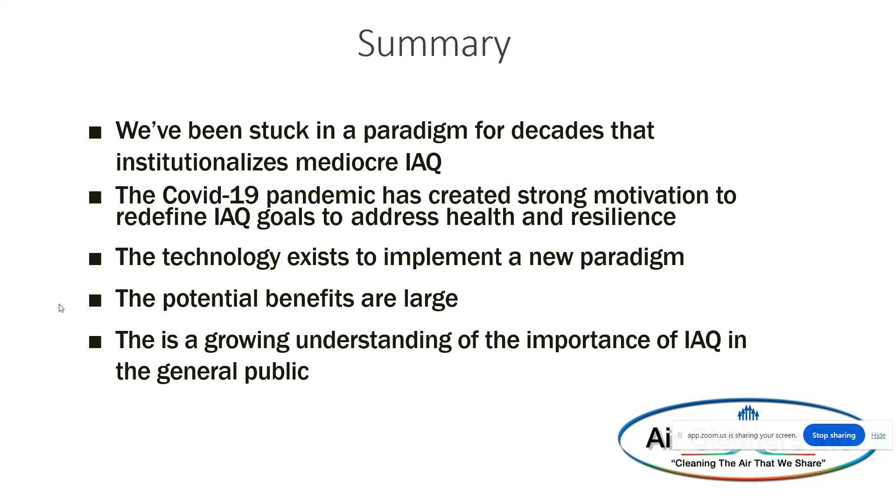There is a growing understanding, but my feeling most recently is that everybody wants to forget about the pandemic. Nobody wants to think about it anymore. So I'm having a little trouble keeping the attention focused on indoor air quality.

Now, choices you make can be important. I used to teach this a lot when I was talking about pandemic and COVID itself specifically. Whenever you enter an environment, particularly a room, and I think here about a pub or a bar or anywhere, particularly where there's low ceilings, watch for low ceilings. Low ceilings mean the volume is low or small, and the concentration will be higher.

So I always think about people, place, time, and space. How many people are in the room is sort of the first one. How large is the room? Are there any air cleaners there? Is there any air moving? Can you feel air moving? If you can't feel air moving, it's not a good thing.

Time, how long are you there? Remember, it is a function of time, because the longer you stay, the higher the probability that you will catch something. And then how much space is there between people? It is still important. As you saw from that animation sequence, distance makes a difference between people. And so you want to keep your distance.